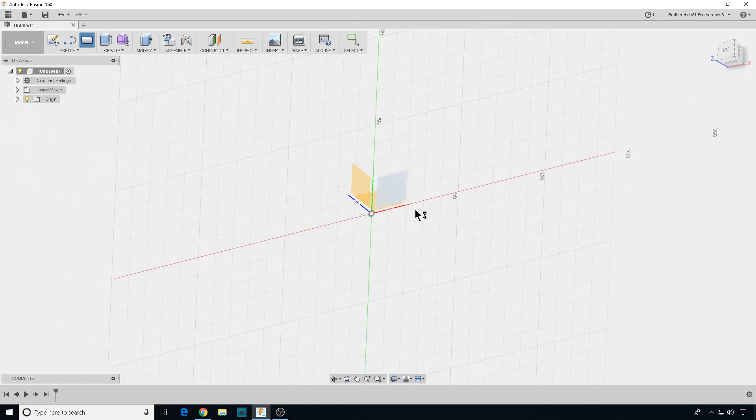So let's start off. Let's turn origin on. Let's grab a rectangle, and we'll hit the Z origin. And let's make this thing about 200 millimeters long and 80 millimeters tall. And we'll stop that sketch, and let's click on it, and we'll extrude it out.

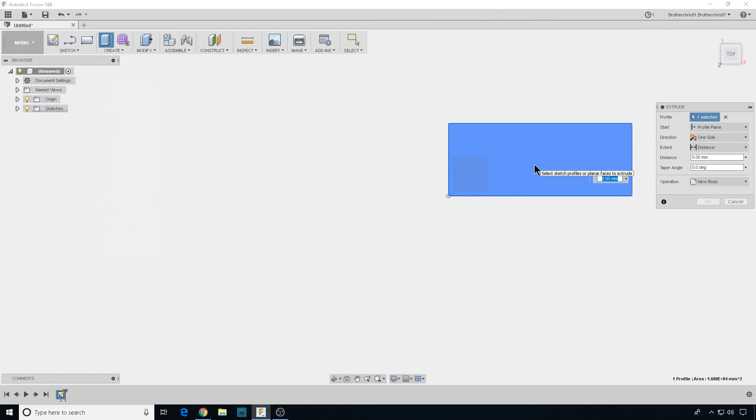You can go to Create, Extrude, or hit the letter E, and let's bring it out 6 millimeters. So again, I don't want to get carried away here. I just want enough to keep the wrenches separate, but I need about six different slots. That's about how many different sizes I use, 1.5 through 5 millimeter.

And my idea is I've got some 10 millimeter round magnets I'm going to use to hold the wrenches on. Now this will probably magnetize that wrench, but I really don't see that as an issue at this time. So let's keep it simple.

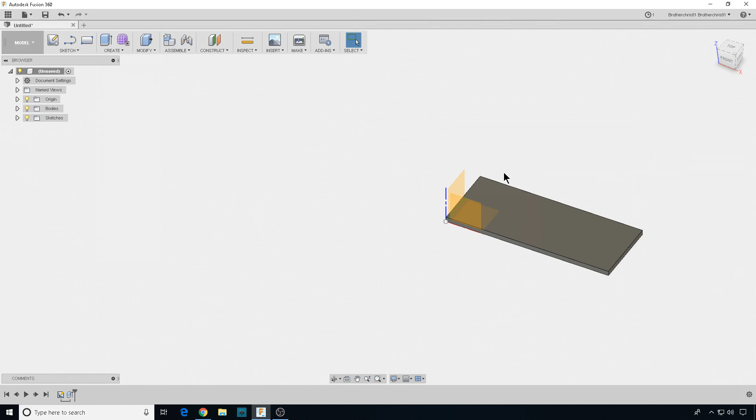Let's get another rectangle. We're going to draw on the face of this body. We'll start up here in the corner. Let's drag down the whole thing, 80 millimeters, and we'll do 2 millimeters wide. Stop that sketch, and let's extrude this out.

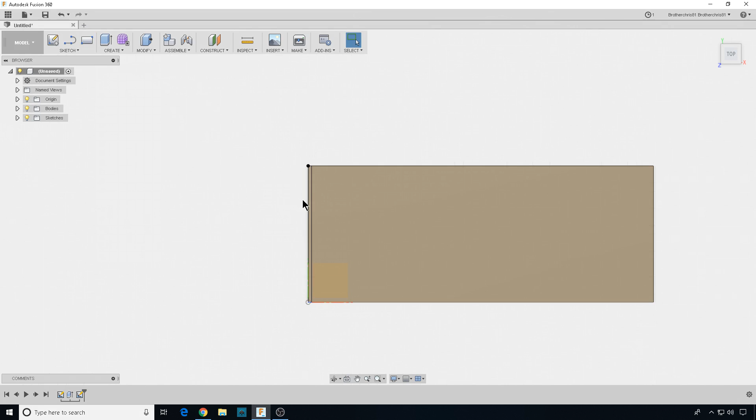So we'll hit E, and let's extrude that out 3 millimeters, but over here we don't want to join it yet. Let's make it a new body. So we'll hit OK. So we have a bit of a ledge there.

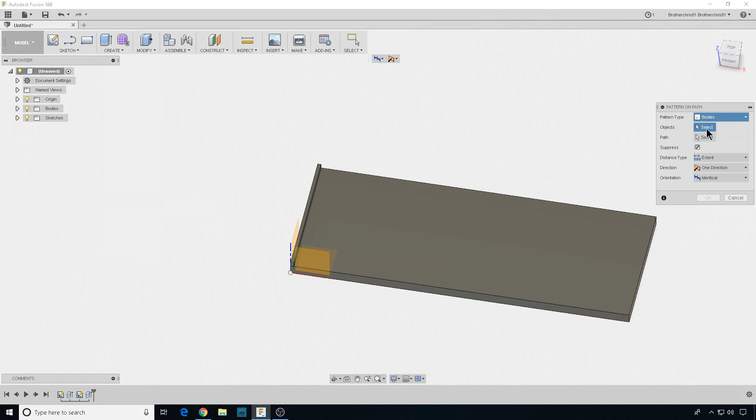That's good. Now we need six different wrench sizes, so we need six different compartments. So let's go to Create, Pattern, Pattern on Path. And we're going to do bodies. Let's select this new body we made, and then select the path. That'll be this line right here.

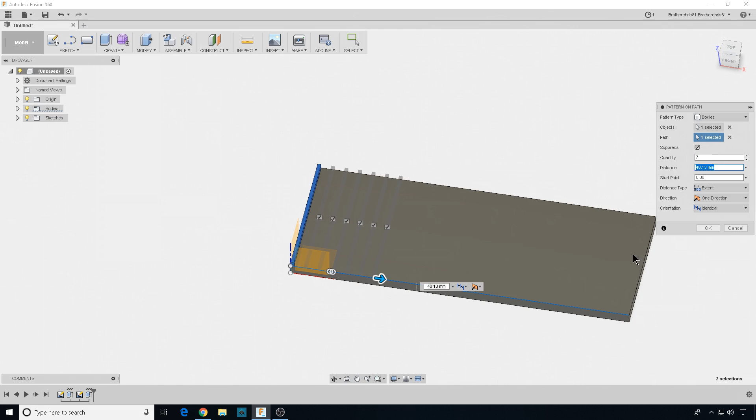And we can drag this out. By default, it's going to do 3, but we need 6 compartments, so we're going to need 7 altogether. This whole thing is 200 millimeters, and these are 2 millimeters wide, so the distance to get over to that corner will be 198. That looks good, let's hit OK. And now we've got our compartments.

Now that the pattern is done, we can go ahead and combine this as one body. If you come over here to Bodies and expand that, here's all the bodies we created, and here's all your sketches. They're currently off, more on that in a second.

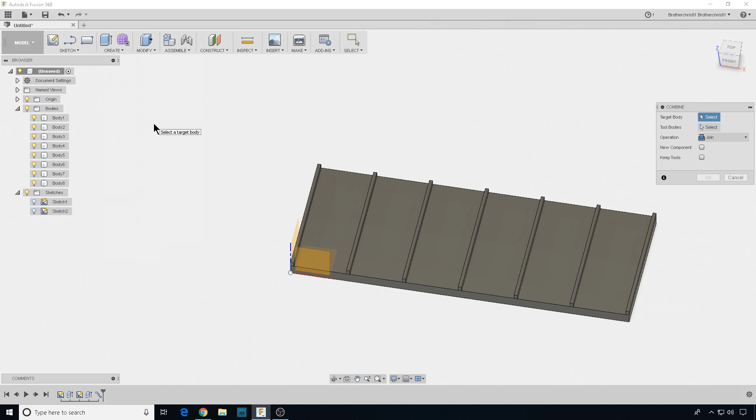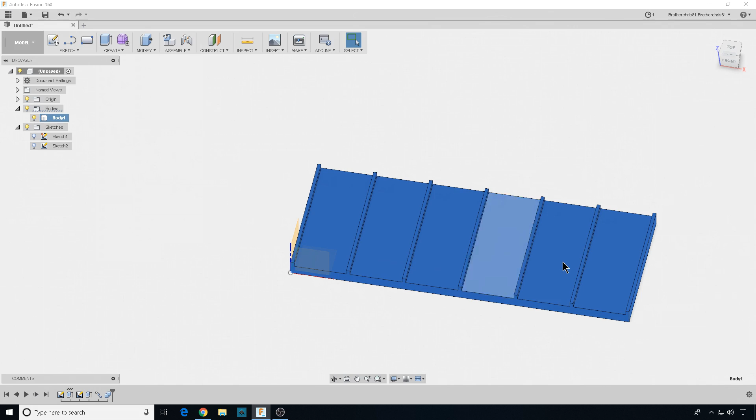So let's do Modify, Combine, and I'm going to select the target body, the base, and then for tool bodies we're going to perform a join. I'm going to select this body, number 2, hit Shift, and body number 8 - that's 7 bodies selected. Go ahead and hit OK. And now we have one total body with all these bodies combined. So we're good, let's go back to the top view.

Now here's where best practices kind of fall apart. You're supposed to use constraints and things like that to be able to tell where you are. I think that takes too much time for quick items like this, so I just use lines. I like to know where the center of my model is, and I'm also going to want to know the center of each one of these compartments so I can line things up roughly.

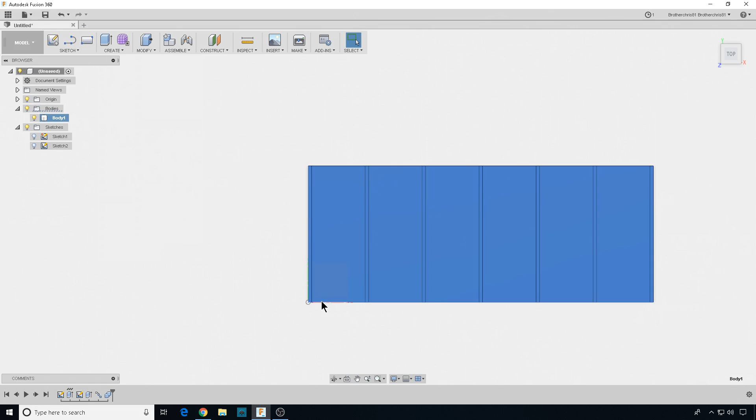So all I do is grab a line. I want to draw on this body, and then if you go down the side of this till you get to roughly the middle, you're going to see a blue triangle. When you hit that blue triangle, that means you're in the center, so go ahead and click that. Come all the way over here to the other side, you see the triangle again - we're in the center, and we've gone all the way through that model. Now you can turn that sketch on and off as you like, but that's a good solid center line you can use for other things.

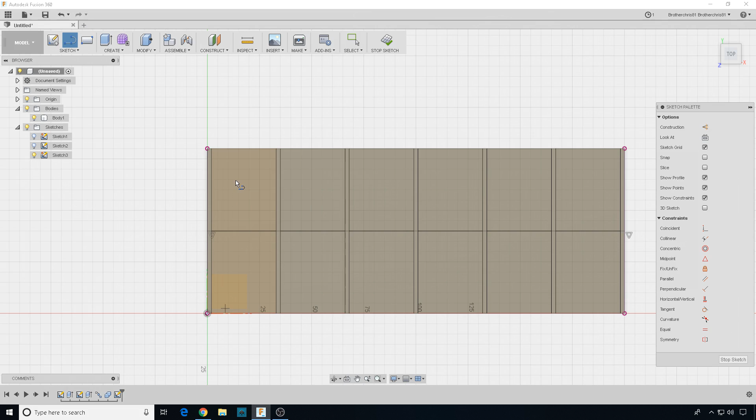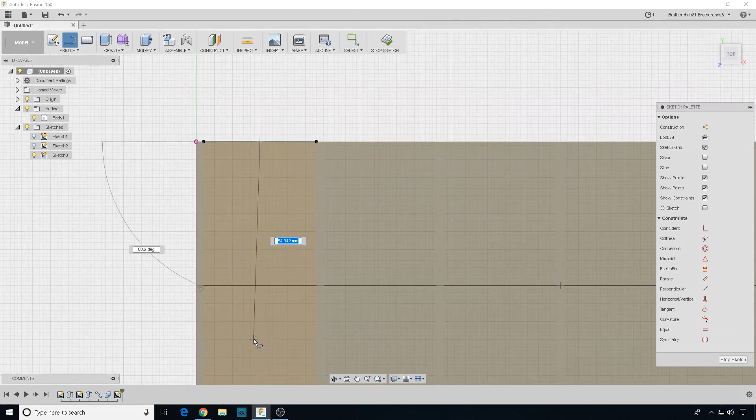Now I want to do the same thing inside this compartment. To get the center of this, I'm going to draw a line starting here at the corner, sketch it over here to this corner, and then automatically sketch it back, and it's going to let me see the center line of that new line right there. So we'll click there - that's the center point. Then we can drag this line all the way to the bottom, and we'll mark another center right there. Now we have a center line for each one of the compartments. Again, you can turn them off, turn them on. And stop sketch - we're good.

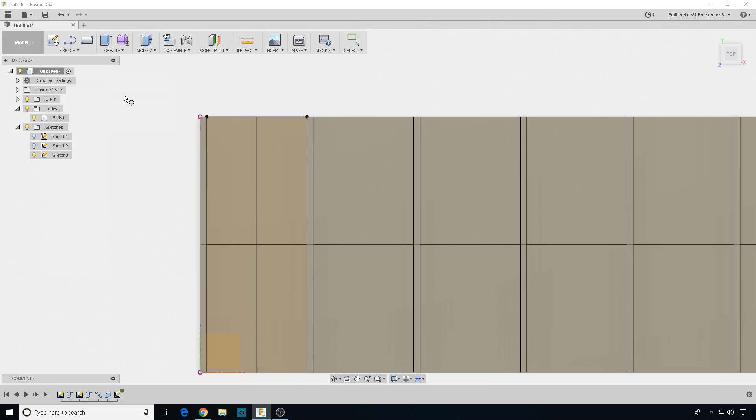So we've got our main rack body, and we know where the center is. Let's go to Sketch and create some holes for the magnets. I'm going to do a circle, but a 2-point circle, and we're going to sketch on this body. I'm going to start the first point of the circle right in the center, but I'm going to move it. Those magnets are 10 millimeters round, so I'm going to do these at 10.3 just to give them a little room, and I'm going to glue them in anyway, so that's good.

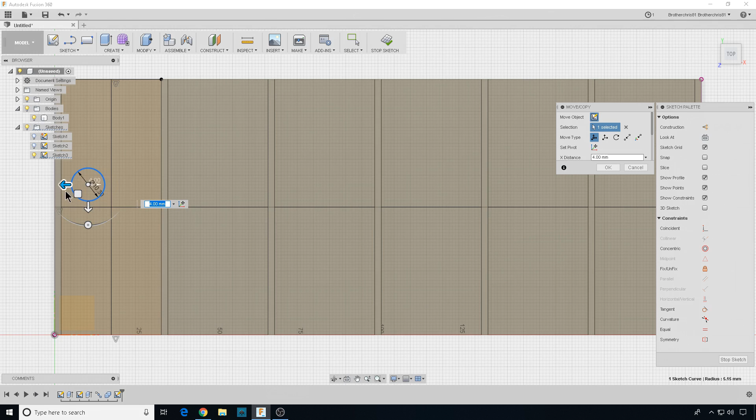And now I can move this sketch around. If I go to Modify, I can go to Move, and we're going to move Object, which is a sketch. I'm going to select my sketch and just move it up here a little. We're just going to eyeball this one. Maybe right there - well, let's move it back a little. That's good. How about right there? That looks good, I like that.

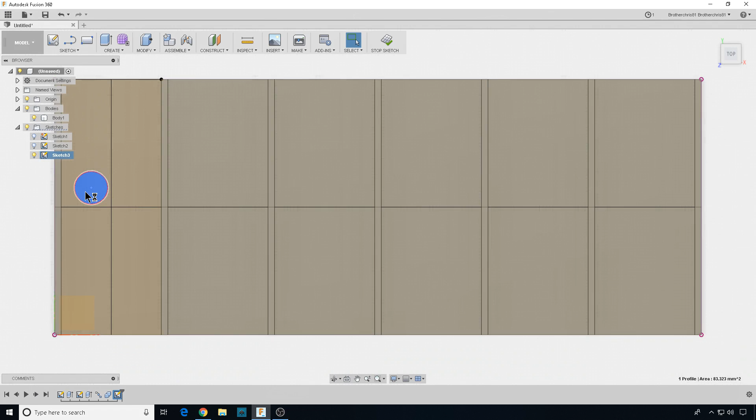I'm going to do 4 of these because I might have a ton of these little wrenches, maybe not so many of the big ones. But I'm going to do 4 anyway, so it's easier to catch my wrench if I just kind of toss it at it. So the easiest thing for me to do, I'm going to click on this hole sketch, hit E to extrude, and cut a hole in the body with it. Those magnets are 3 millimeters high, so I'm just going to hit -3. That'll go the opposite - you can see over here it flips to cut. So we'll hit OK.

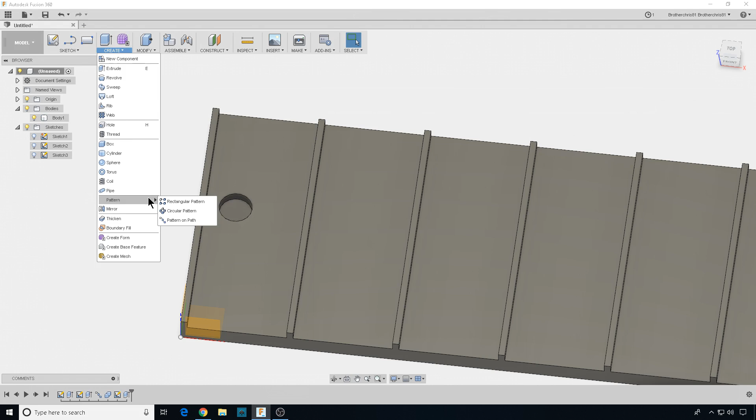Now we can take this hole and use it as a face to pattern more holes. Let's go to Create, then Pattern, Rectangular Pattern. We're on Faces. I'll select the inside of this hole as the face, and I want a quantity of 2 left and right and 2 up and down. So let's select our directions.

I'm going to turn the sketches back on so I can see my lines. This is my first direction, and this is my second direction. We'll change these back now that I changed the direction.

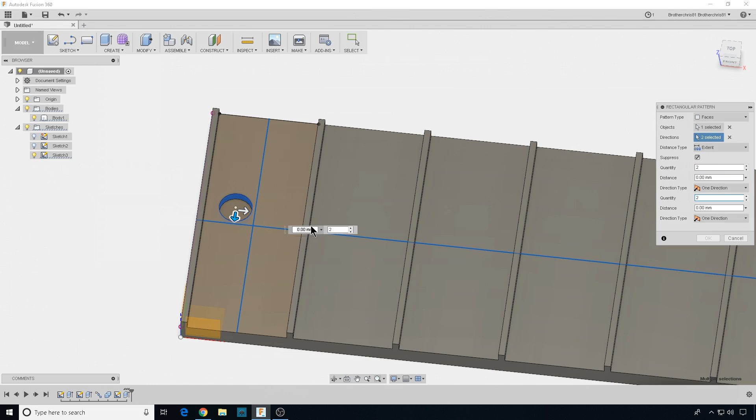2 and 2. Let's drag one over here and zoom in a little so we can see that. Again, I'm just going to guess, whatever looks right. I like 12.5 for that one. Now let's drag this one out, and I think 12 millimeters looks pretty good. Let's hit OK. Looks good. Now we have 4 spots to glue a magnet in.

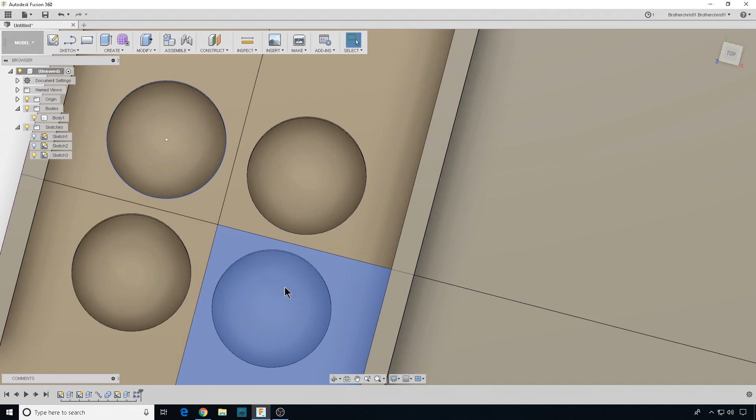So we'll back out, go back to Home and get recentered, then back to Top. Now I want to repeat all these for all these different chambers, so let's lean it out just a little bit so we can see the face.

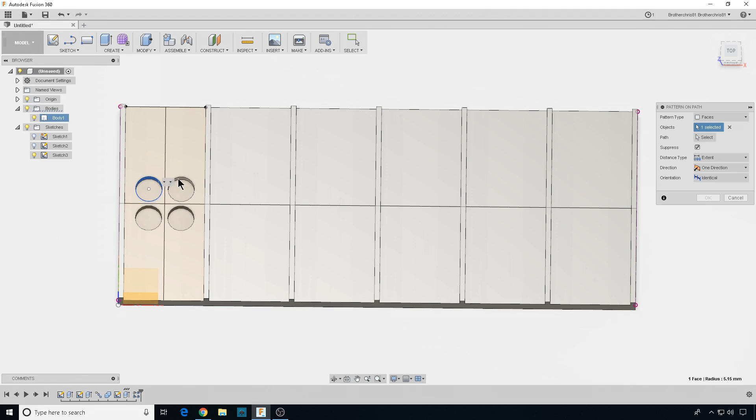Let's go back to Pattern, pattern on a path this time. We're going to do Faces, select. I'm going to select all 4 of these faces for these magnet holes, and select my path as my center line. Then I'm just going to drag these out.

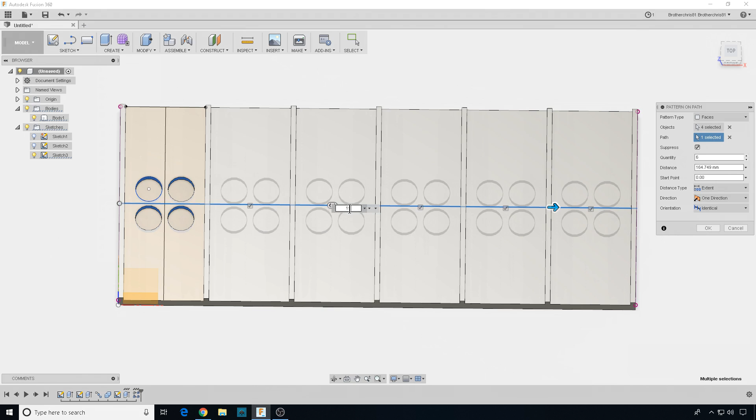And I need 6 total, so let's change this to 6 and keep dragging out. Again, I'm just going to eyeball it. I know the OCD is probably getting really bad, but this is how I do it. So I like that, looks good. Let's make it a nice even 165. What do you think? I like it. Hit OK. Now we've got all the magnet holes in all the chambers.

Now I'm going to use just regular wood screws to screw this down to the shelf, so let's make a couple of screw holes. Let's go to Sketch, then Circle, and we'll do the center point circle. We'll draw on this body, and we can center it here, but really its location doesn't make a whole lot of difference to me.

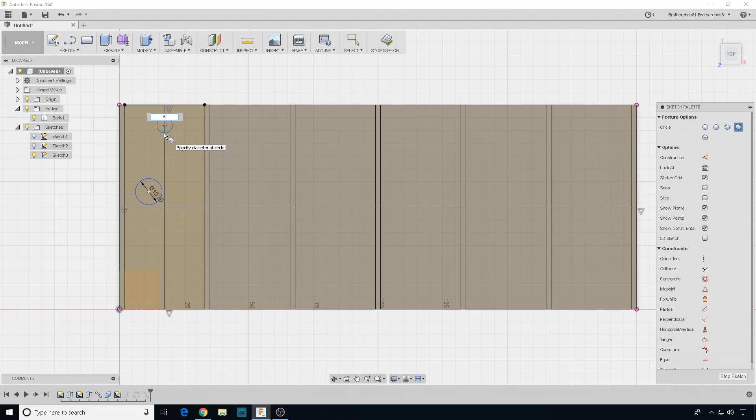If you really wanted to get accurate, you could draw a line here and measure it a bit. Let's say it's 8 millimeters. Then you could take your circle, center point right there, 8 millimeters out. We're going to make a 5 millimeter hole, which fits a wood screw pretty well. And then we're going to make this a through hole.

So let's do E to extrude. Let's select our hole. If you leave your lines on, you'll have to select both sides. Let's do -6, that's how thick the base is. That'll cut a hole straight through.

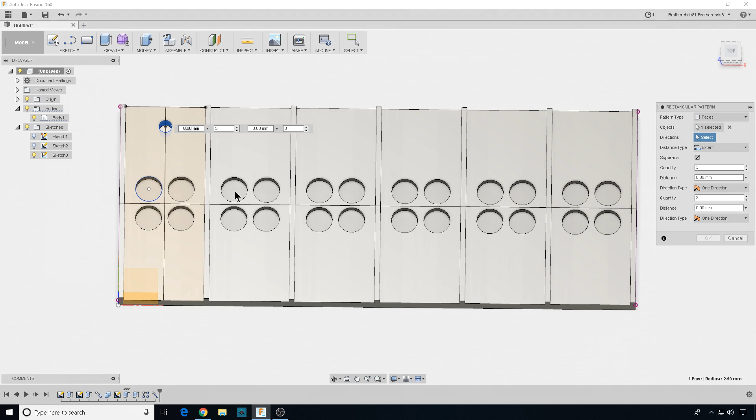We're good. Now let's copy this, we'll do 4 all the way around the body. So let's do Create, Pattern, Rectangular Pattern. We'll keep it on faces. We'll select this face, and we're going to select the directions. We want 2 vertical, 2 horizontal, so quantity is 2 and 2. And then we can drag these out.

This whole body is 80. This is 8 millimeters in, and this is 8 millimeters in, so this one's going to roughly be 64 away from the other one. On this side, it's going to be in line with these magnet holes, which is roughly good enough. Again, we don't have to be perfect. Let's call that good.

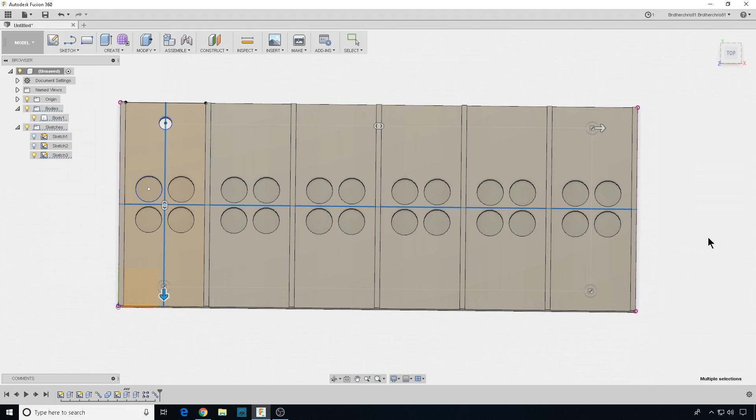Those are going to be flathead wood screws, so let's put some fillet on these holes so they're flush. Let's go to Modify, we'll do fillet, and select all 4 of these holes. Let's pull these down until we're satisfied. It's probably a little much. Let's do 3 millimeters, that's good.

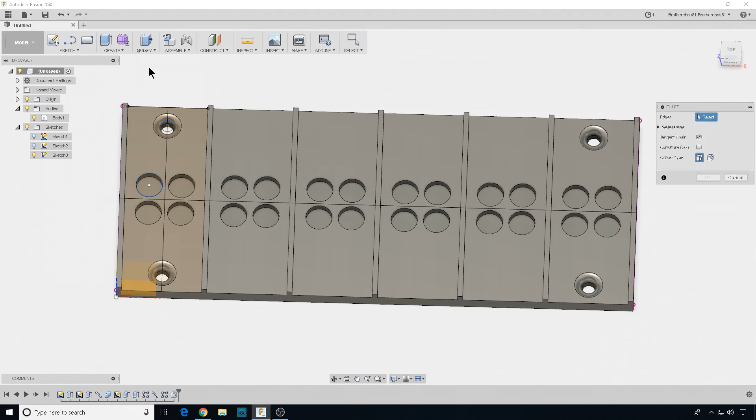Let's add some fillet to make it a little more smooth transition in between these walls and the magnet keepers. So let's go to Modify, Fillet again. I'm going to select this inside line, the bottom one here, and select all of these. Let's drag it out until it looks right. How about 11.5? That looks pretty good.

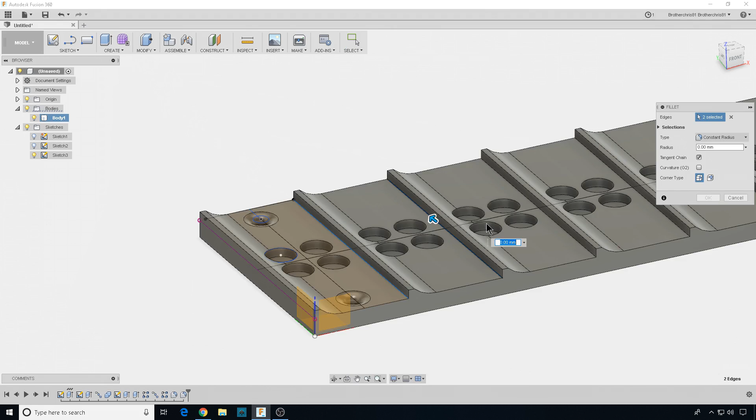And then we'll do the other side. You can go up here to do fillet, or you can just hit F. We'll select all these, 11.5, looking good.

Alright, let's go back to the top view. This is pretty much what I had in mind. This should be pretty easy to use. Now there's one more thing I want to do.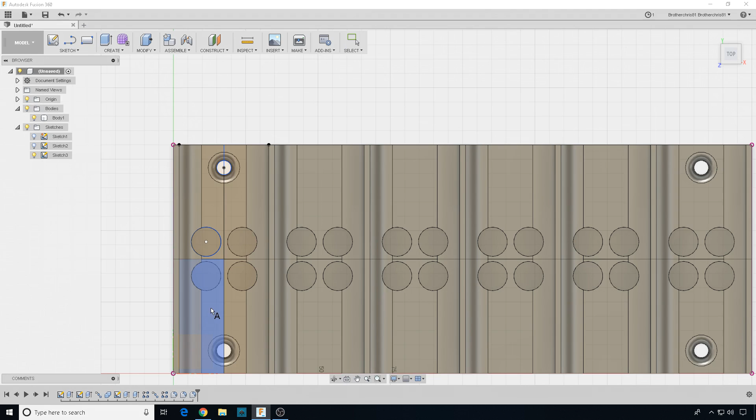Because I have 6 different sizes, might as well go ahead and label them. Now text isn't the easiest thing to do in Fusion, but if you go to Sketch, you can go to Text, and then we can type some stuff in. So we'll just select this face, and we can type in our text here.

The smallest size I use is 1.5, and it never fails that it comes in upside down. So we'll just rotate this 180 degrees. And we can stop that sketch.

And let's move this sketch. You can hit M, or you can come up here to modify and hit move. We'll select sketch, I'll select this text, and we'll move it down some.

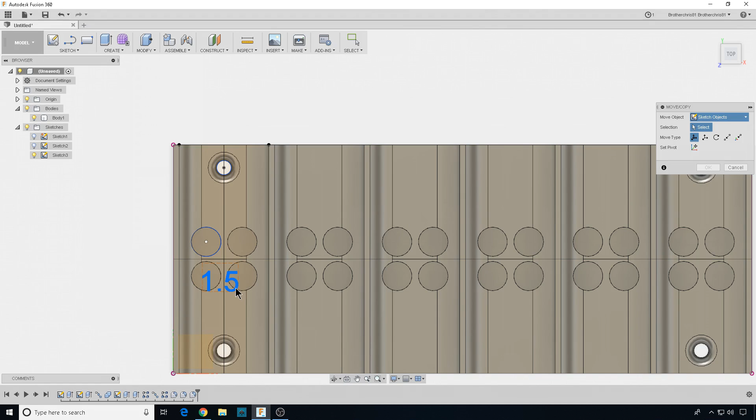And let's put our decimal point here right in the center of the center line. About right there, that looks good. And let's snap a line so we can line all the numbers up like this.

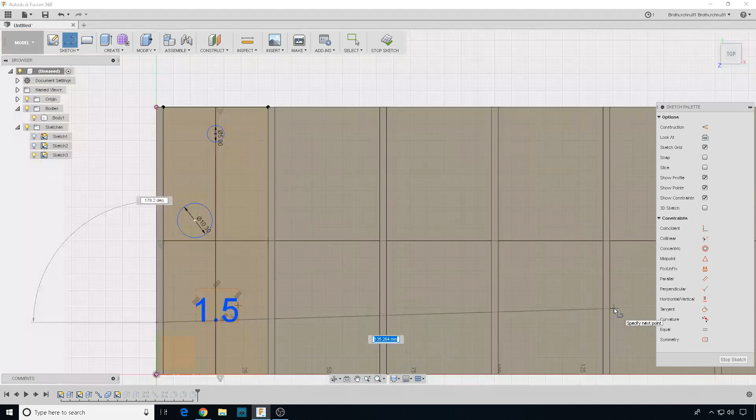So let's go to sketch, grab a line, click on the body. We'll just put the line right through the bottom of this number, all the way over to the other side of the body. And now we have a rough area where to put the rest of the numbers.

So we can stop that sketch, and let's create the rest of our numbers. So sketch, text, and I'm just going to create them all first and then line them up later. So 2.0, we'll do 2.5, sketch, text, 3.0, not dot, 4.0, and 5.0.

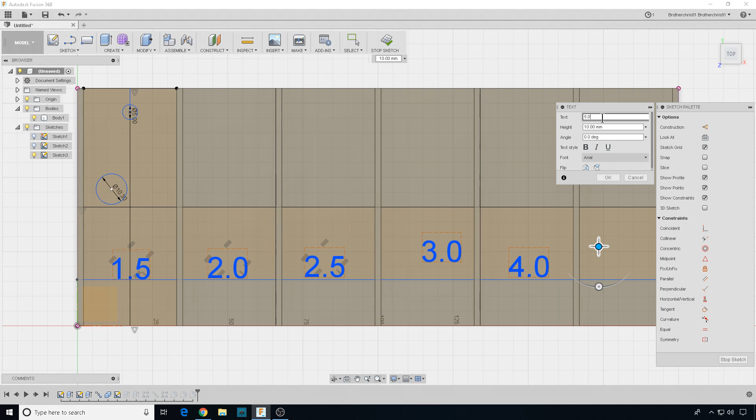Okay, so we're close, but I still need to move some of these around to kind of straighten them up. So we'll just use the move tool, modify move, we'll move sketch. This one needs to come over just a little bit.

Same with 2.5, 3.0, 4.0, I got kind of close. And then we'll line up 5.0. There we go, I'm happy with that.

Now you can either extrude these numbers to give them some character, or you could cut them into the body. I prefer to cut them in. So let's do extrude, we'll hit E, and we'll select all of our numbers.

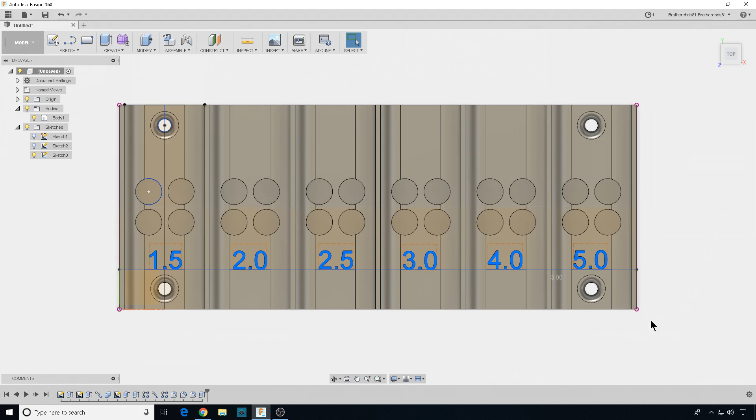And let's inset them 3 millimeters, so negative 3. Automatically takes us to cut, we'll hit OK. We can turn our sketches off. And that looks like a hex key rack to me.

So we only have one body, so it should be pretty easy to print. Let's go to Make, 3D Print, uncheck the 3D Print utility, we'll just save it as STL, hit OK. We'll save it as hex key rack.

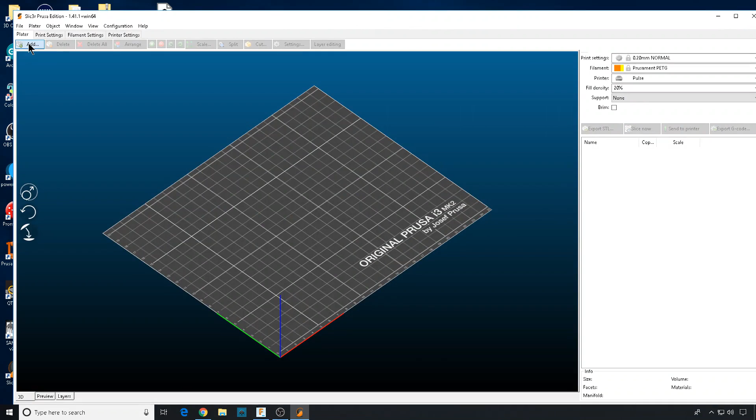And from there, we can bring it into Slic3r. Looks good, we can do a quick slice to test it out and make sure everything's okay. Do a preview, looks good to me. Now let's print it.

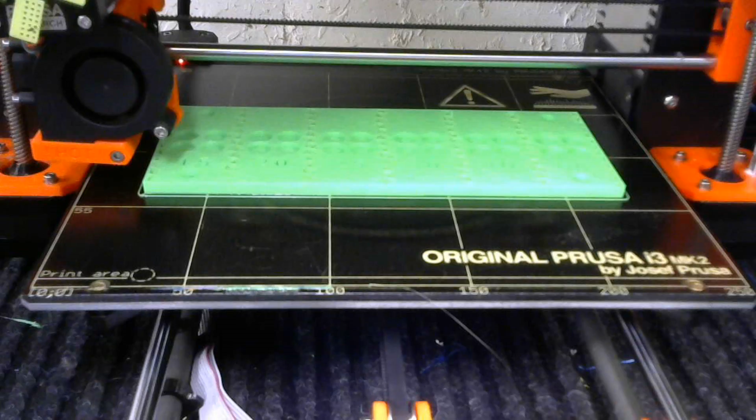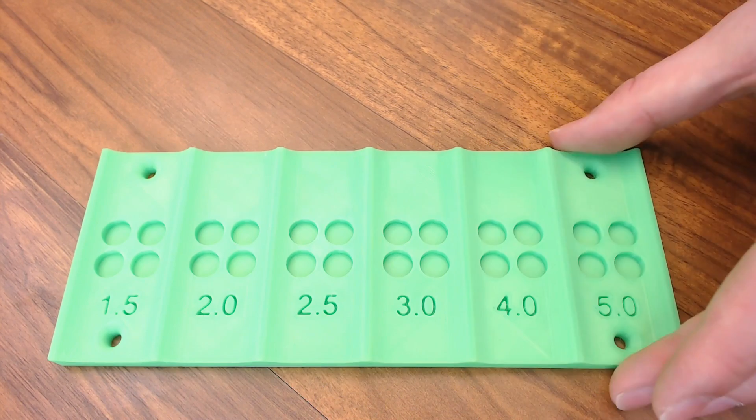And here it is, let's take a look. For a first attempt, I think it came out great. This is just some PLA, I think it's dazzle green. The wood screws I'm going to use, they fit pretty good in here.

Maybe a little more fillet on that hole, but not bad at all. A nice fit, and the magnets I'm going to use fit perfect. So now I'm just going to glue a bunch of these in here.

And done. Let's screw this down to the shelf right about there. Looks good, let's throw stuff at it.

And I've 3D printed my way out of another one. Now again, I'm sure there's a lot better ways to do this in Fusion and a lot better designs, but that's not the point. The point is, if you have an idea, there are tools available to help you make that a reality. Even if that idea is not functional, just go ahead and create it. Who knows where that could go in the future?